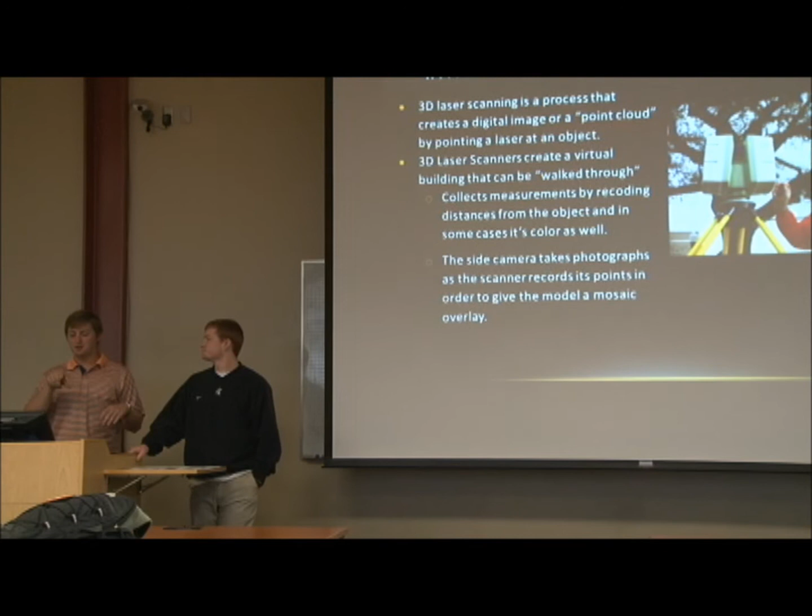A 3D laser scanner is basically a little scanner, a laser pointer that sits on a tripod. What it does is rotate around on its axis and takes a scan of whatever it is, whether it's a mechanical system, a wall, or something else.

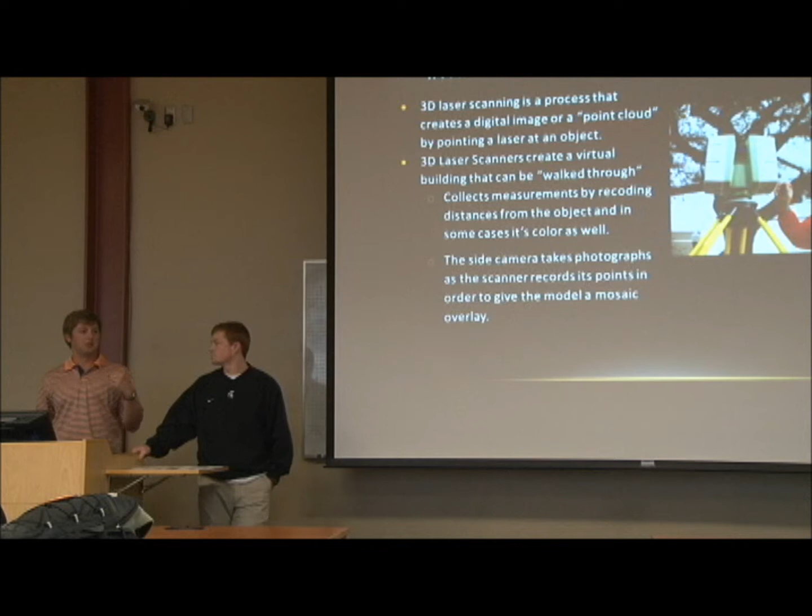It points little lasers onto that object, and those lasers are called point clouds. It'll shoot the laser out, and the image is returned back to the scanner. They use those point clouds to assemble an image of whatever it is they're scanning.

There's also a camera that fits on the side of some of these lasers. As the scanner is taking its image, the camera is also creating what they call a mosaic of the actual object.

So when they're putting the object you're scanning into a CAD system, you're also able to have the actual physical representation out there. So if it were the Gorrie Center, it wouldn't just appear as a gray wall on the drawing—you could see the actual details of the outside of the building.

The process works like this: the scanner scans the object in 3 different dimensions. So you get your distance to the object, its height, the width, and everything like that. It's very useful when you're plotting out different things during the construction process.

They usually take up 50,000 point clouds per second, and these point clouds, in terms of their distance, are very, very accurate—down to 500,000th of an inch. So they're very, very close to the actual distance. They use these images to put into a CAD system and eventually produce a 3D model.

They're used in construction. I thought this was pretty interesting: throughout the construction process, say a building's being built, you can set up the camera right here when just the steel beams are up, shoot that, and then set it up again after they put the drywall on and shoot that.

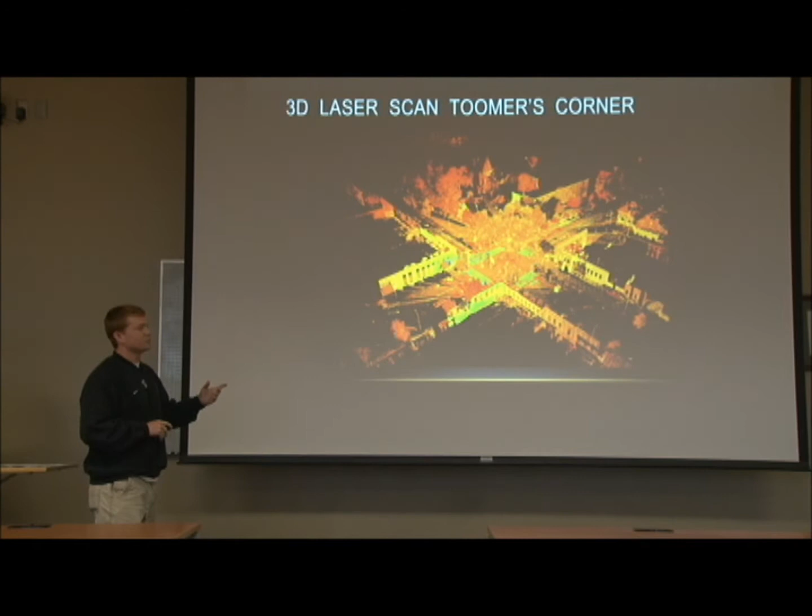After the poisoning of the Toomer's trees, they figured they're probably going to die. So while they're still alive right now, they would scan them so that over time, maybe 10 years from now, they can get exactly what those trees looked like, not just pictures of them.

Whatever the university wants to do, whether they want to build some kind of man-made structure or replant something else, they can get what is most like that. Plus, you could set it up into some type of interface where people could actually walk through Toomer's Corner.

Another way it was used is in the Auburn Arena. When Robins and Morton built the Auburn Arena, after they capped off and put the roof on, they used these laser scanners and set them up and scanned the entire inside. All the stadium seating is completely custom built, so it helped with the shop drawings, because instead of taking measurements of every single seat, they were able to go in with this system, and after just one guy, one day, scanning the entire inside, they got exact measurements of the radius, the curves, everything they needed. It cut time in way more than half. Some of the advantages of 3D laser scanners, like Terry just said, is the time saving.

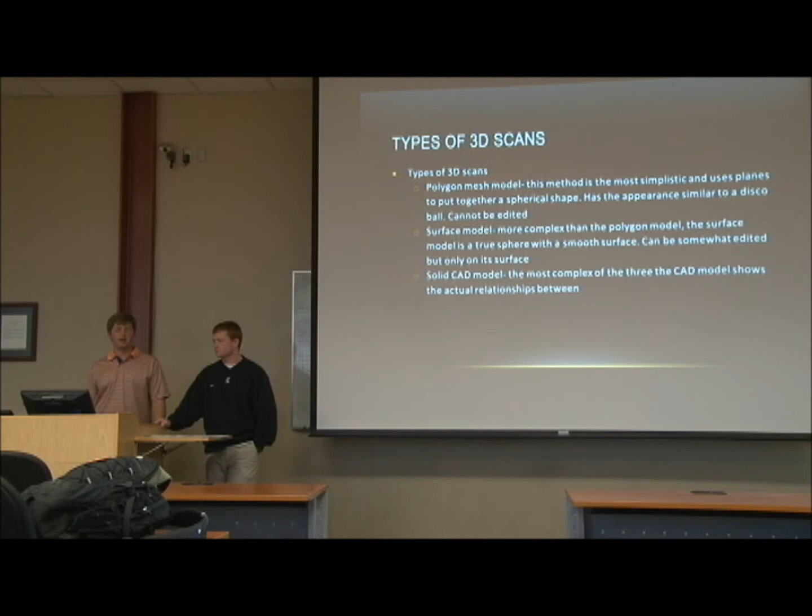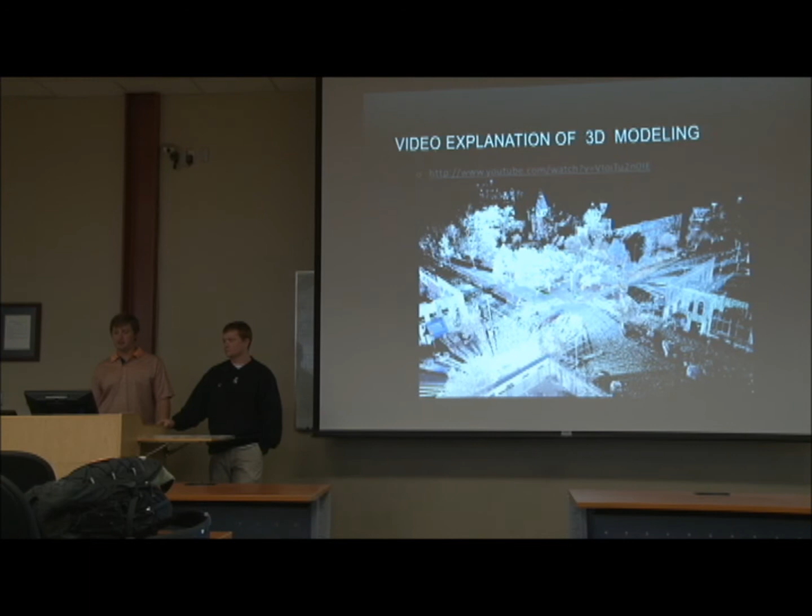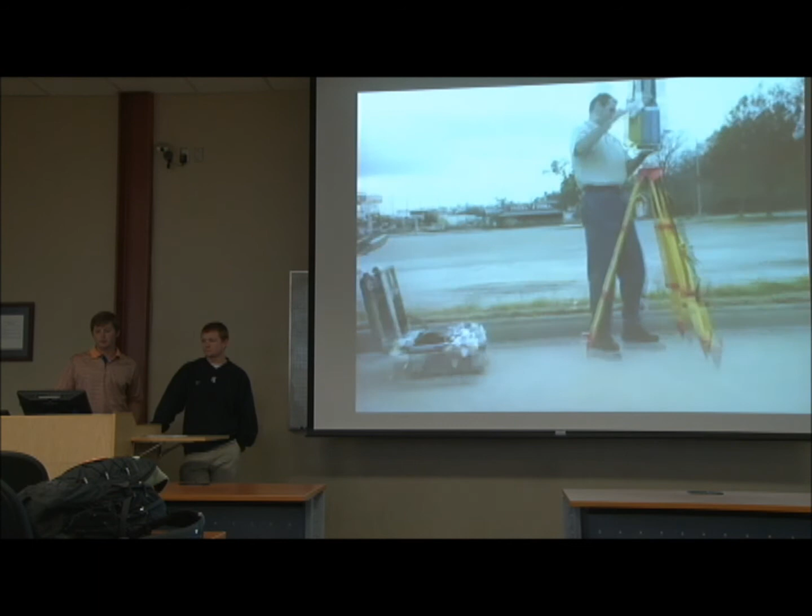The instrument is then set up in the first scan position, and the scanner begins to record. Millions of accurate 3D points are collected in minutes. This process is repeated for each desired scan position around the bank. All scans are then cleaned and connected as a single cloud of points within the scanner manufacturer's software. It can then be brought into AutoCAD for design.

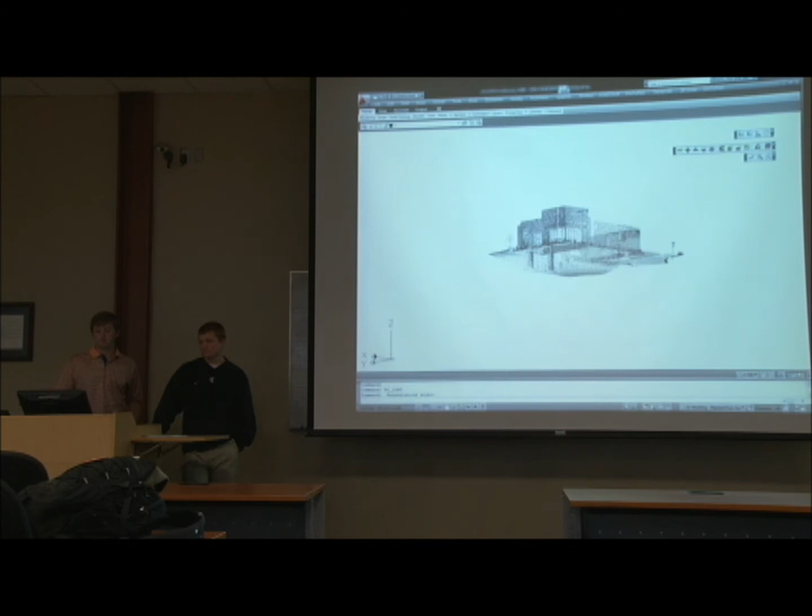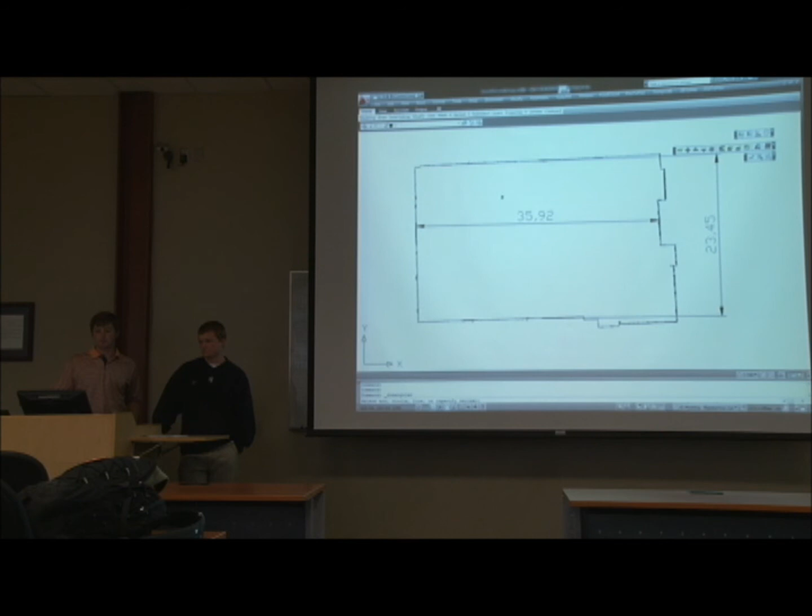For a simple 2D floor plan, a slice is taken from the body of the building. These points are then digitized with traditional AutoCAD commands, and dimensions are recorded as well. What appears to be a 2D plan is actually sitting inside the true-to-scale 3D world of the building.

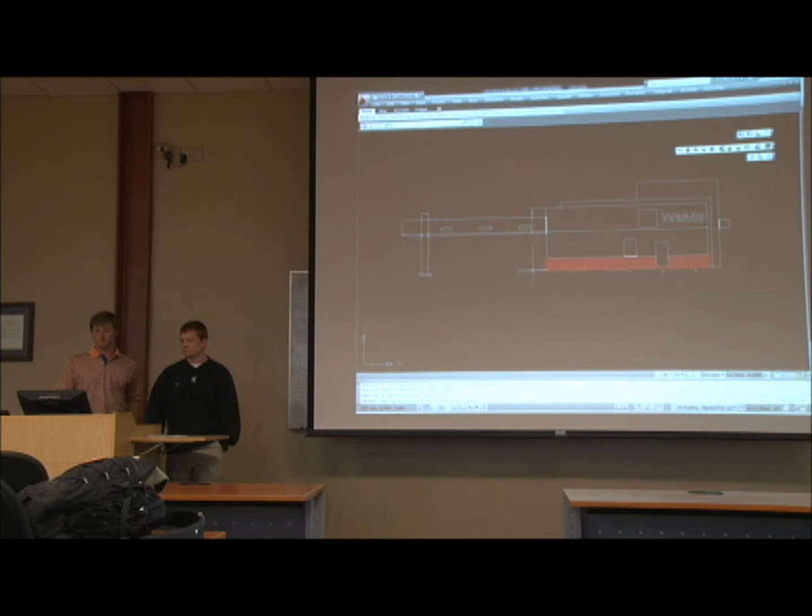Elevations are similar in nature. Simply set the correct UCS view in CAD and begin digitizing. Although this example has not been completed, it provides a high-quality template of the as-built conditions. The result is an accurate 2D elevation inside a 3D point cloud.

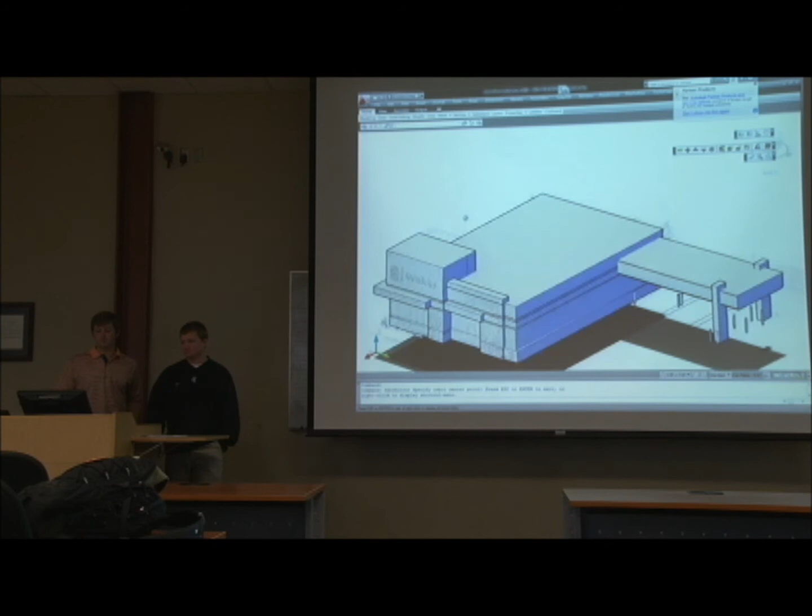3D modeling is also achieved through traditional AutoCAD modeling techniques. This is an example of a simple solid model created from the cloud data. In the end, laser scanning gives a user more information in minutes than what could previously be collected in a lifetime. It opens the design world to exciting new possibilities.

So as you can see, this is a very, very useful product with all the little gadgets it gives to you. But that's all we have. Do y'all have any questions about 3D laser scanners? Any questions?

On that bank project, did they put the scanner outside and inside the bank to get all the detail they would have had to? That one they didn't, but you can put the scanner anywhere you want, as long as you link the points. That's what they did - they took those 5 different points and assembled all of those in the AutoCAD system, so it connects all those together and gives you the outside dimensions of it. I don't really know the exact details of how the lasers work, but that's how it does it. Basically, you have a panoramic view of the outside of it, and it assembles those distances to give you your image in there.

So if I understand right, it shoots out a laser, so it knows the distance and the position of that point, like a brick on the side of the building - it knows where that is in space. But how does it get information about the color of the brick and the texture and all that stuff? It has a camera on the side of it, and there's a bunch of different things you can do with it. As it's going around, it can take pictures, and they can overlay that camera image with all those points you've taken, piecing it together and integrating it into the actual model. What's happening is it's taking so many points - 54,000 points a second - that because there are so many, like with a TV, you have so many dots that's just one color, and it becomes a full image that you can see. It's just the same.